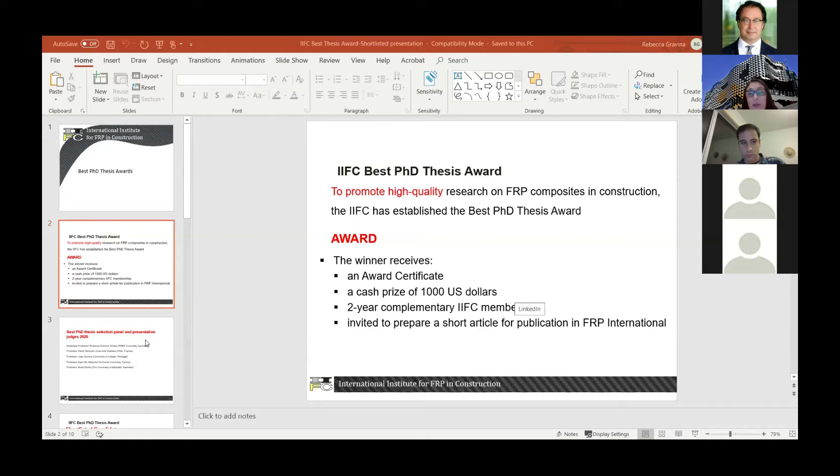We received several applications, and the selection panel and judges for this year are as follows. I've chaired the Best Thesis Award category. Professor Karim Benzarti also worked on the committee to shortlist applicants, and we have Professor João Correia, Professor Alper Ilki, and Professor Scott Smith as part of the presentation judging panel today.

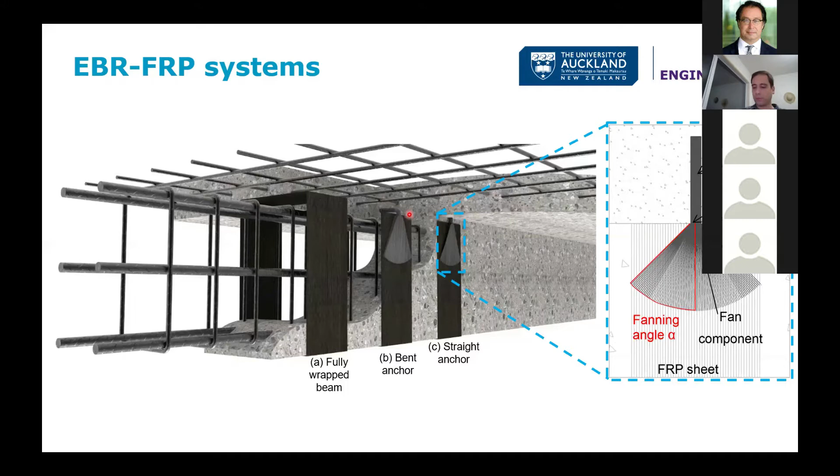Then we have the fan portion, where all the fibers fan out and bond to the sheet behind. We can make wide anchors or narrow anchors, and that width is determined by the fanning angle alpha, which I specify as half of the fan - you'll see why in a few minutes.

The part of the anchor where the fibers transition from the dowel into the fan is usually called the key portion, because it's where all the fibers break if we have fiber rupture failure mode. In addition to the diameter and embedment depth of the dowel, we have the fan dimensions and the insertion angle beta.

So all of these parameters at the bottom will determine the failure mode. This is how I started my PhD, looking at the different failure modes we can observe in FRP anchors. On the left-hand side, these six here are concrete-related failure modes, for straight anchors at the top and bent anchors at the bottom, and the governing parameters are the strength of the concrete, the depth of the dowel, the diameter, and the insertion angle beta.

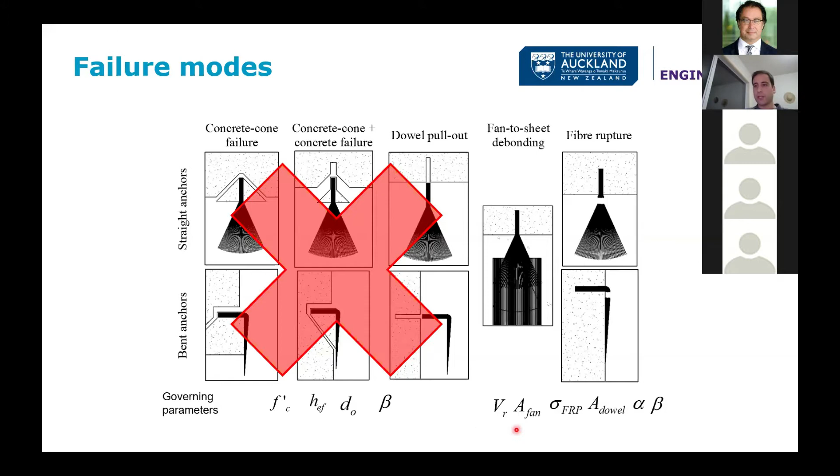Then looking at the next failure mode: fan-to-sheet debonding, where the fan debonds from the sheet in the background, and the parameters are the shear strength of the resin and the area of the fan. But I thought this wasn't really interesting to me, and it wasn't complex enough for a PhD project.

So I focused on the fiber rupture failure mode, where all the fibers break, usually in the key portion, whether we have straight or bent anchors. The parameters are the strength of the FRP - you can also use the modulus of elasticity times the rupture strain - the area of the dowel, so how big the anchor is, the fanning angle alpha, so how wide or narrow the anchor is, and the insertion angle beta.

Once I knew what I wanted to do, I had to figure out how to do it. So I developed this testing setup, similar to the shear strengthening of a beam we saw in the first slide, but upside down. That beam at the bottom is the slab, where we have the anchor introduced, and then we have a concrete block at the top, which is the beam, and these two are not connected.

Then we have the sheet wrapped around the block, with the FRP bonded to the sheet and then introduced into the beam. Without spending too much time, I basically lifted this block vertically until the fibers broke, and recorded the load. This is for straight anchors. On the right-hand side, for bent anchors, similar approach, just the anchor goes bent into this block rather than straight.

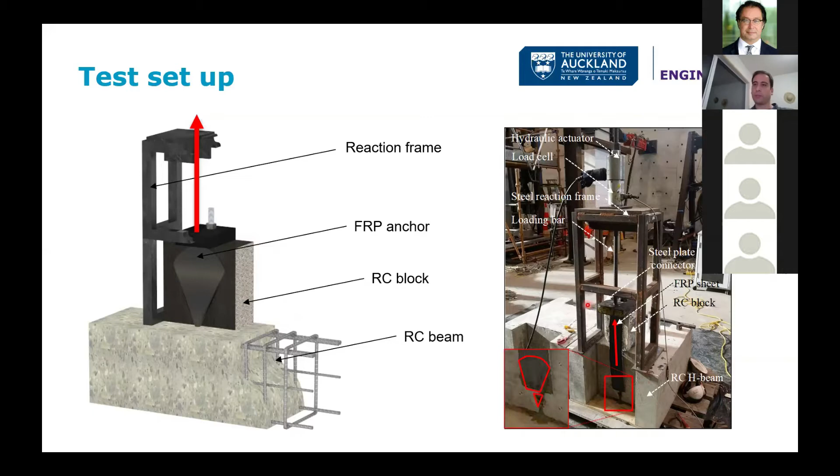So I spent a whole lot of time in the lab, getting my hands dirty, installing FRP, breaking FRP, and I ended up with 110 specimens: 72 for straight anchors and 38 for bent anchors.

In terms of fan angle alpha, I looked at three different angles: 15, 27, and 60 - 27 because it's as wide as it is long. Then for straight anchors, I looked at different sizes, in dry cross-sectional area, from 14 square millimeters all the way to 168 square millimeters. However, for bent anchors, when I got to 84 square millimeters, the efficiency was very low, something like 40% or 45%.

Talking to the engineers at the company I was working with, they told me that if the efficiency was so low, they wouldn't use it anyway because it wouldn't make sense from a business or economical point of view. So I stopped there. That's why I have fewer specimens of bent anchors.

So I recorded the load for all of these 110 specimens, and I started to look at the scientific background, at the theory of how the force is transferred from the sheet on the right-hand side, through the sheet, through the anchor, through the dowel, into the concrete on the left-hand side.

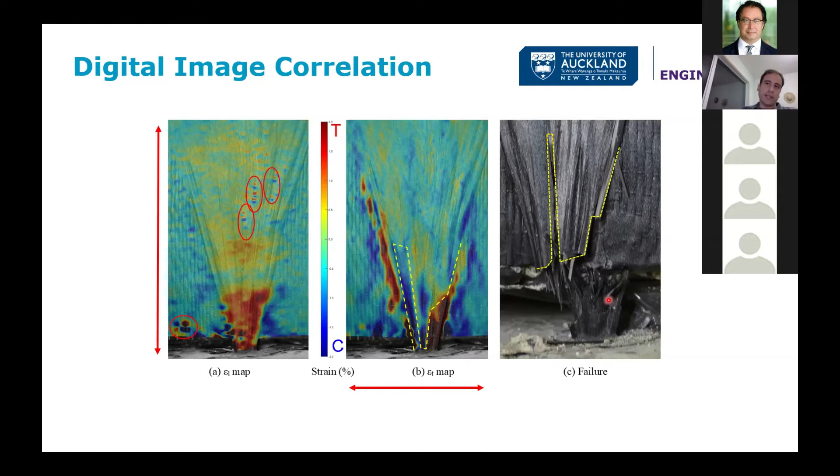That got me thinking that, in fact, the strains in the transverse direction play a role as important as the strains in the longitudinal direction. So I thought, well, as the anchor gets wider, the load decreases for the same size. So wide anchors are less efficient. That means that for wide anchors, that factor is more important than for narrow anchors.

I came to the conclusion, without spending a lot more time on this because I don't have the time, that if I do the sum of all the infinitesimal forces in the longitudinal direction minus all the infinitesimal forces in the transverse direction times 2, then my data match this hypothesis very well. So I was very happy with that.

The problem is that this force transfer mechanism doesn't account for the 3D direction, for how big that dowel is. And from research and from my own experiments, I knew that a big anchor is less efficient. An anchor twice as big is not twice as strong. So I started to look at different options.

I looked at many different hypotheses of how or why that could be. And I came across Mobius transformations, which, if I have to be honest with you, is really complex. It's fundamental mathematics. I had to go to the Faculty of Math to talk to a professor there to really understand what this was about. Long story short, these are used to map the complex unit circle into the real axis line.

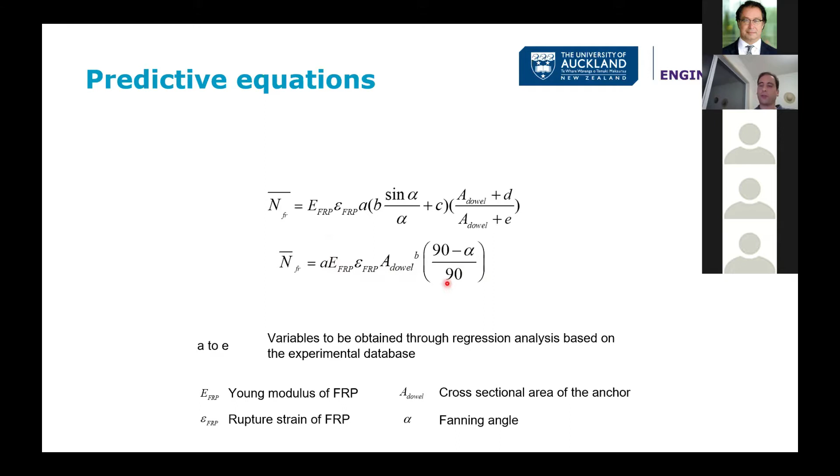Looking at the statistical distributions, standard deviations, and so on, I developed 3 equations: one to predict the average value, one for the 95th percentile lower bound characteristic value, and another for the 99.87 percentile, a value sometimes used in FRP, for both straight and bent anchors. The only difference is the factors A and B.

So this all looks good, but while doing this testing in the lab, I thought, how applicable is this really? I'm doing one test of one anchor in the lab - how applicable is that when you have a whole structure, multiple anchors, FRP wraps, and all of that? So I decided to do a case study.

I decided to do flexural strengthening of columns for 3 reasons. First, because there is no research - the only paper I could find, by Professor Alper Ilki, used a similar approach with longitudinal FRP, but not anchors. Correct me if I'm wrong, but I think he used NSM bars. So I thought this was a very innovative idea.

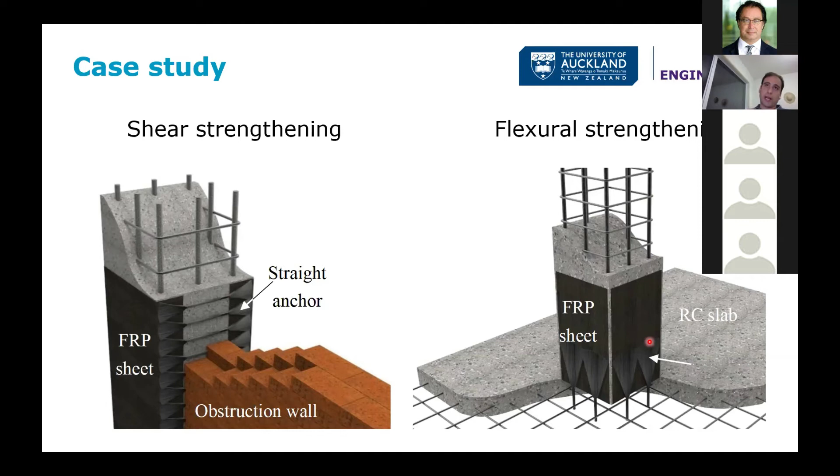I designed 6 columns based on those from Contec, the company I was working with. We built them in the lab, and I tested 1 without FRP and 5 with FRP. There's a lot of information here, but bear with me - the main objective was to check if I could calculate the moment capacity using section analysis.

But for columns 5 and 6, we decided we wanted to break the sheet rather than the anchor, because the company thought it would be easier to repair if it failed. So we increased the number of anchors and their size, and we could calculate the moment as well.

Finally, in column 6, I used a bond breaking layer at the bottom half meter, because we observed in these 4 columns high asymmetry, and the FRP would debond in the compression cycle by something similar to buckling, instead of the tension cycle by slowly debonding.

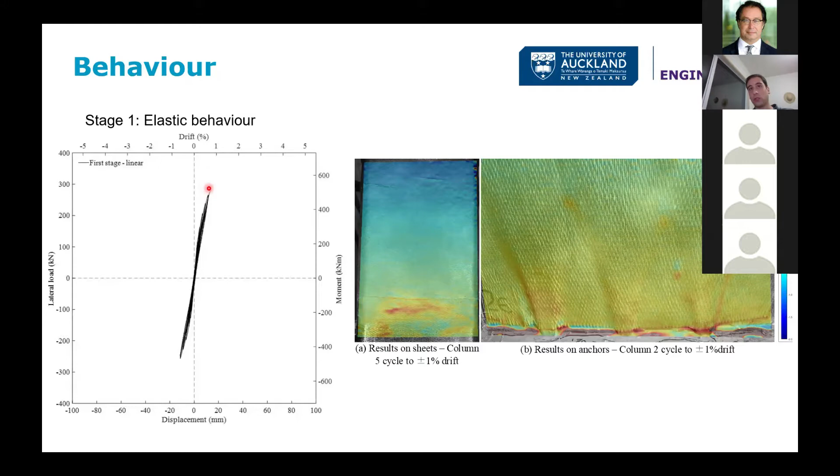Then an inelastic hardening stage. This is column 6, by the way, so you can see it's quite symmetric. In this stage, all the FRP debonded from the bottom all the way to the top until the first FRP rupture. That's the peak point, where the FRP ruptured for the first time, whether it was an anchor or a sheet.

Then in stage 3, the FRP ruptured slowly, depending on the column, sometimes more slowly than others. And then when all the longitudinal FRP was broken, the as-built behavior was resumed, which summarizes to this trilinear behavior: linear elastic, inelastic hardening, and then as-built, which gives us 2 points, the debond point and the peak point.

Now, there is a lot of numbers in here, but don't try to read them, just listen to what I'm saying. R2K, by the way, is just using Response 2000, using moment curvature and section analysis.

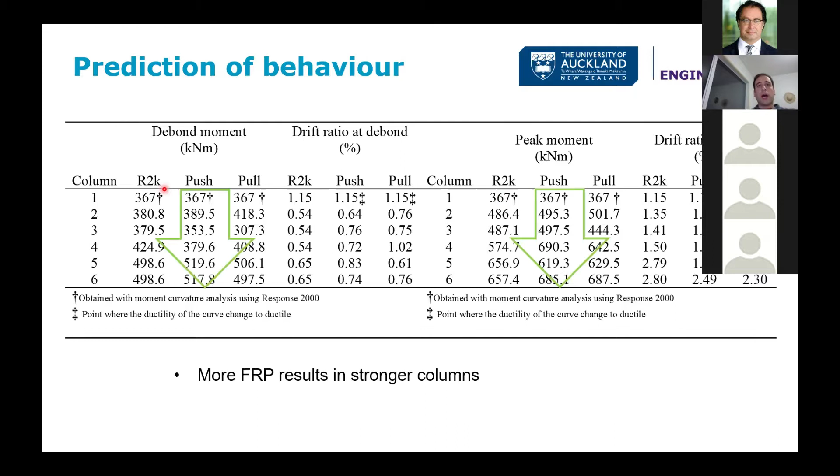As we increased the amount of longitudinal FRP, the moment increased, both the debond moment and the peak moment. And I could calculate that quite well, I think. 6.2 difference, 6.6% difference, so I think it works. It's just section analysis, with one more material with different properties, but it can capture the moment capacity.

However, the drift is all wrong, because all of the plastic hinge theory and all the drift theory is based on reinforced concrete, steel and concrete. So it cannot capture the stiffer columns that result when you put FRP in it.

And I am about to finish. If I had to say what I did during 3 years in 2 sentences, I would say that I developed new equations that allow predicting the fiber rupture failure mode of FRP anchors. Then I combined them with existing research by Scott Smith and Ravi with other failure modes, but that was not part of my PhD, so I left that out of this presentation.

And then I developed a new innovative seismic strengthening scheme for reinforced concrete columns. Now, I think the work is quite highly cited. I published most of my research last year in 2019, but I am more proud of the impact that the research is having in the industry.

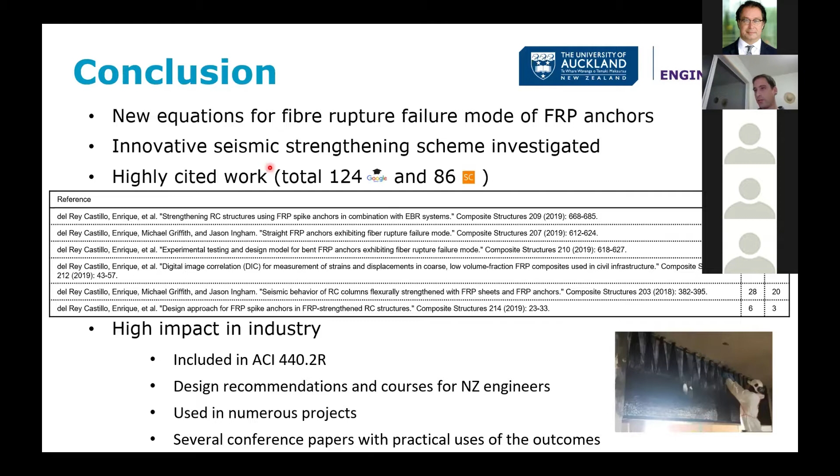So that's something that makes me proud, and these are used in many projects. This is a coupling beam for shear walls, columns. This is a bridge to elevate the seismic capacity of the pier wall. And I published several conferences summarizing these practical uses. And that's all. Thank you.

Thank you, Enrique. That was very informative and really well presented. So I enjoyed listening to your presentation. Thank you for that.

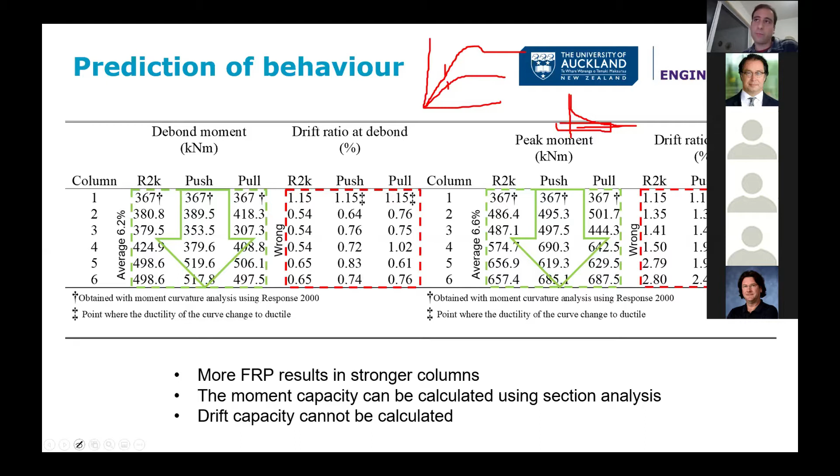But it becomes really complicated because we actually have two plastic hinge lengths. Basically we have one plastic hinge here at the bottom, the normal one. But then at some point when all the FRP is debonded, a second plastic hinge forms here. So you have double curvature - the first one going like this, and then the second one going like this. It's really, really complex.

Okay, no, I understand. Good, thank you. No problem. Do we have any more questions?

Rebecca, perhaps I can ask a very short question. Thank you, John. First of all, Enrique, congratulations for your excellent work and very nice presentation. I have just a small question - your work is of course very comprehensive. You solved, let's say, a problem. You have provided recommendations for design guidance. You have industrial applications. What's left to be done in the future? Is this a closed topic now, or is there something else still to be done?

So there are a lot of uses for FRP anchors. This use is only when you want to transfer the whole load or part of the load from the FRP sheet into the structure with anchors. But I think one big portion of research that needs to be done is what happens when you have FRP anchors in the middle. How is that going to change the boundary conditions, the bonding between the FRP sheet and the concrete? I'm trying to get some funding for that, but it's really hard because it's going to be expensive research.

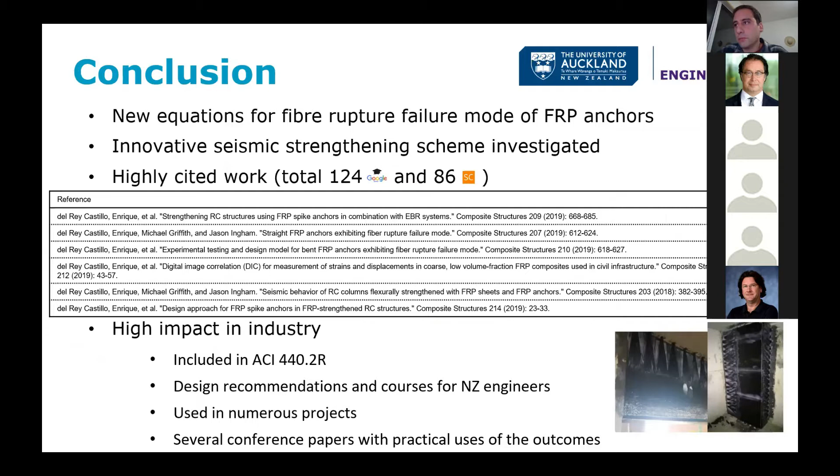You mean in the column test? Yeah, in the column test. No, they were all like this because I didn't want concrete failure. My whole PhD was on fiber rupture, so I focused on the fiber rupture.

Okay, because there's probably another issue about slip. In our experience, where we use this kind of FRPs, of course straight, not bent, we had an issue of slip as well, which might have been playing a role on the displacement as well. In your case, if there are some fiber ruptures, not at the same time, but some gradual rupture of the fibers.

Anyway, sorry. Yeah, I did another, I'm not sure how many, I think 8 or 10 columns in the last couple of years with funding from Ravi and Tarek. And we didn't use this method to be a bit more realistic.

And we couldn't see any slipping of the dowel out. We were trying different things. The paper is in the second round of review, so it should be published soon. We tried to do a bad job at installing the anchors, basically, a bad job at soaking the anchors, but the dowels never came out.

Okay, thanks a lot. Yeah, thank you.

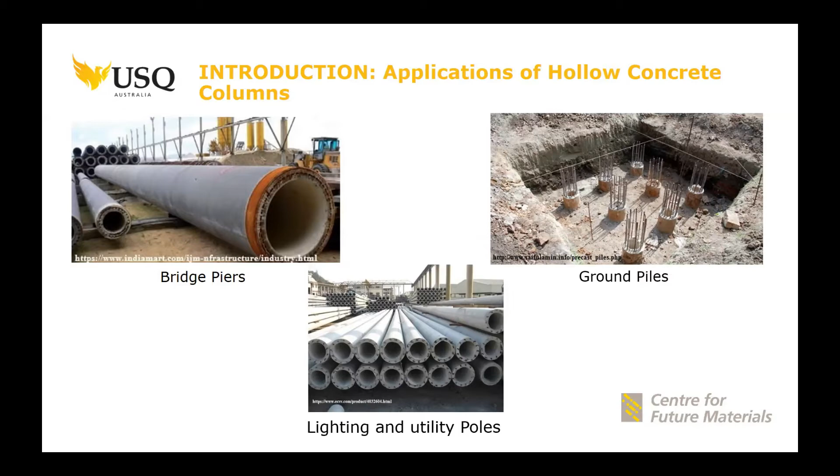So I was looking for the current applications of hollow concrete columns, and I found in the industry there are quite a few applications including bridge piers, ground piles, and even lighting and utility poles. From that I concluded that it can be implemented, and many people before me have already implemented the idea. However, it's a little bit limited, and I was looking at what the advantages and benefits of designing hollow sections are, and what the limitations are, because I can see there is limited widespread use for that type of application.

And from seeing the cross section itself, you can tell it's lighter in weight, and for sure the design will be more economic and structurally efficient. I drew many lines underlining 'structural efficient.' So I was about to quantify how the concrete column with a hollow section inside can give us a reduction in material compared to the reduction in the inertia as well.

So here you can see the inner diameter and outer diameter of the hollow concrete column. Based on basic engineering, I did a small quantification of increasing the inner to outer diameter ratio in terms of material reduction and inertia reduction. I found that you can get significant material reduction with very minimal inertia reduction. As a case study, a 0.5 inner to outer diameter ratio can give you a quarter material reduction and only about 5% inertia reduction.

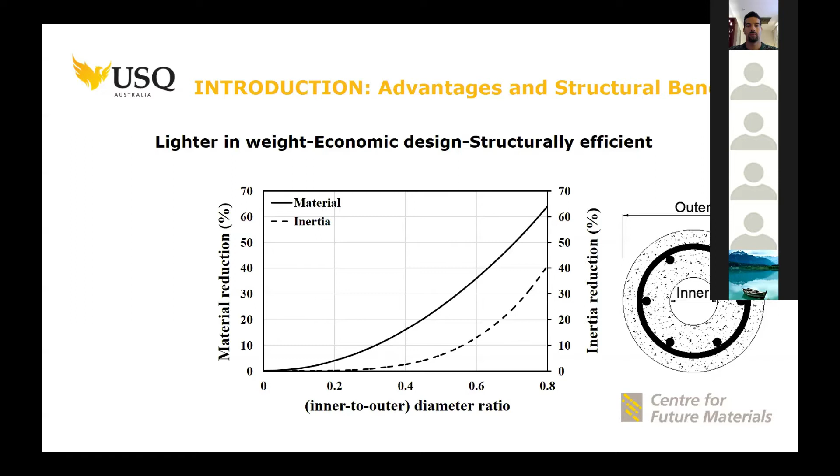After that, I looked at the stability of hollow concrete cross sections, and I found that with the slenderness ratio aspect, increasing the inner to outer diameter ratio reduces the limit of the slenderness ratio. All of these aspects got me convinced about this application and motivated me to investigate it further.

So I asked myself: why is it limited? Why isn't it more widespread? Because people generally prefer solid sections over hollow sections.

From the literature, I found an interesting answer starting from the premature failure phenomena for hollow concrete sections and their lower ductility or displacement capacity. As an example, one scholar did a study in 2010 comparing solid and hollow sections together. You can see they're similar in stiffness, since we're talking about stress to deformation behavior. However, the peak is different - there's a gap between solid and hollow columns at the peak.

The most critical part is the response after the peak, which relates to displacement and ductility behavior. You can see that the solid section introduces a more stable behavior than the hollow column, which gradually reduces its load or stress capacity.

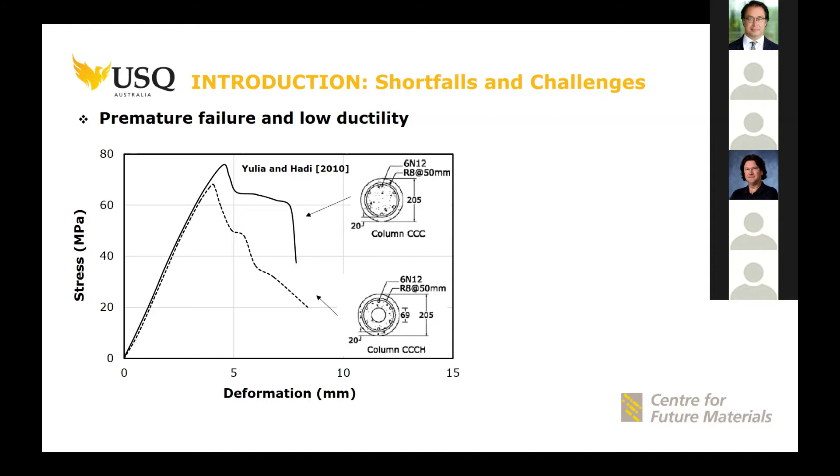In one of our published papers, we go in depth describing that phenomenon based on the constituent behavior of the column itself. In a reinforced concrete column, there are three parts composing it: the unconfined concrete cover outside, the reinforcement, and the inner confined concrete core.

By looking at the behavior of the confined core versus the unconfined core, we can tell that the unconfined cover is shared between solid and hollow sections, and the steel bars have the well-known plastic behavior.

However, the confined core inside is the major difference between hollow and solid concrete columns. The steel bars and unconfined concrete behave similarly, but the confined concrete is different. That's due to the absence of the core inside, which changes the stress formation from triaxial in the solid section to biaxial in the hollow section.

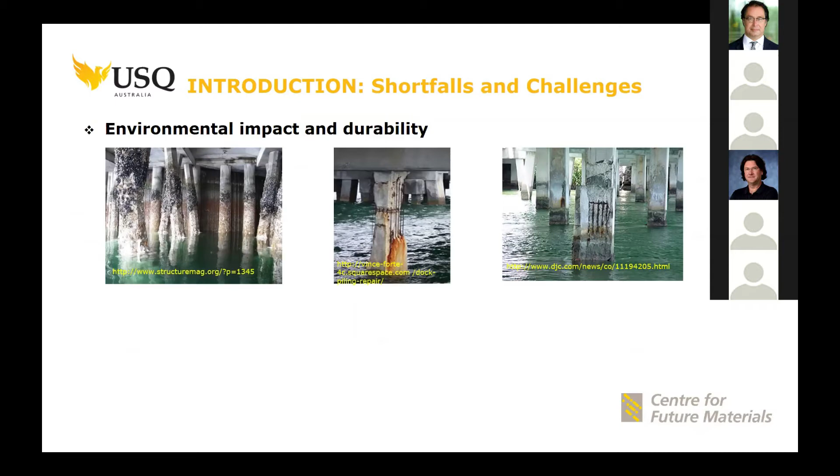We then went deeper to find another challenge, a global challenge related to the durability of these sections, especially RC steel reinforced sections. We all know about corrosion and how it can damage RC members.

To give an example, Australia spends more than 13 billion dollars per year on demolishing, rehabilitation, and other techniques to deal with corrosion problems, including shutdown costs and rebuilding structures.

There have been many studies trying to overcome corrosion. We can see there are many techniques for that, starting from galvanizing the steel and coating with epoxy, and cathodic protection for the steel bars. However, all these studies just confirm that steel corrosion is reduced, but it's never actually stopped. And there is additional cost to having these techniques.

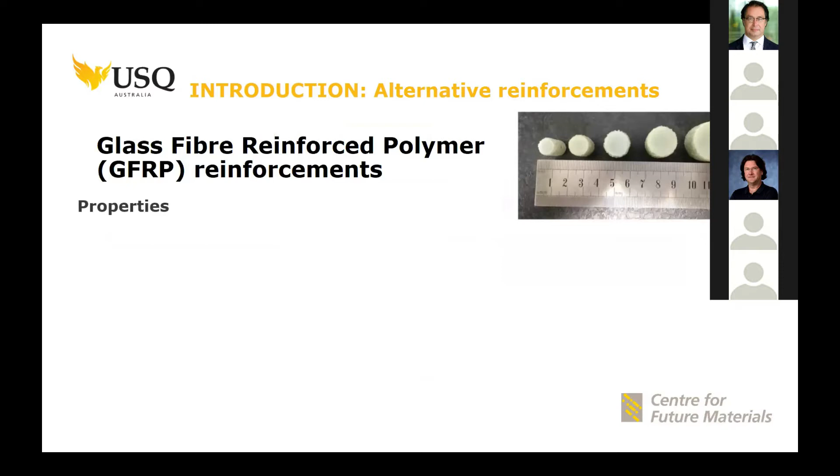So an essential question is, what is the alternative? We all know that the newly manufactured reinforcement, glass fiber reinforced polymer, is now globally accepted as internal reinforcement for concrete structures, and you can tell from its properties of having high strength compared to steel.

You can see from the figure the difference in strength, at least double the strength. Despite the low modulus of elasticity, it has high strain capacity, at least 1.5 times the rupture strain, not the yield strain, of the steel bars. All of this depends on the grade of the glass fiber bars and the steel bars. There's also a high strength to weight ratio for GFRP bars compared to steel bars, around 0.25 or a quarter of steel density.

From our recently published work on GFRP reinforced sections, we replaced the galvanized steel bars in the boardwalk planks with GFRP bars. The doubt was the initial cost of the bars. However, we were able to reduce the manufacturing time by 30% using the GFRP bars, related to the density of the bars and the handling process.

On the other hand, these bars don't corrode and are neutral electromagnetically for special designing purposes. These are not new bars; there are many successful applications in slabs, beams, columns, footings, walls, and beam-column joints, among other applications.

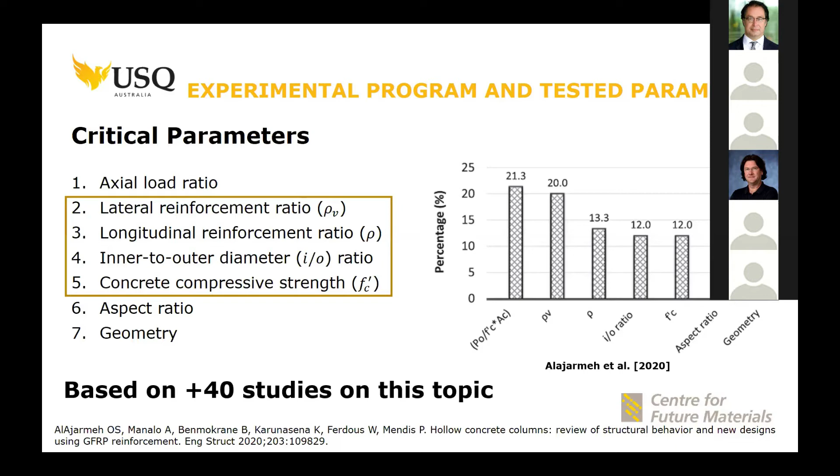Because of that, we selected these highlighted 4 parameters and designed the experiment based on them. We selected a range of inner to outer diameter ratios, different longitudinal reinforcement ratios, and different lateral reinforcement ratios by changing the spacing between lateral reinforcement. We also selected 4 ranges of concrete strength within the normal range, and tested under pure compression until failure, using strain gauges and LVDT instrumentation.

From the test results, the effect of inner to outer diameter ratio was very clear. We were surprised to see that increasing the inner to outer diameter ratio increased both the strength and the displacement capacity. That was absolutely related to the properties of the reinforcement, which steel reinforcement cannot achieve, because of the linear elastic behavior of these bars until failure.

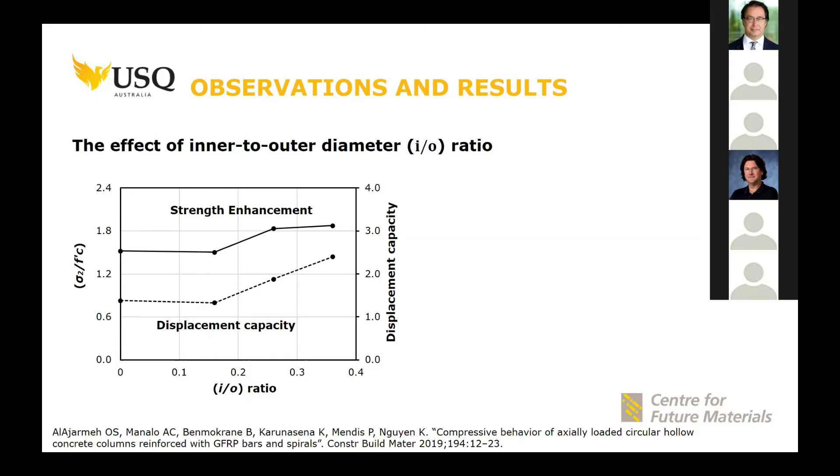One interesting thing we saw with the maximum inner to outer diameter ratio column was its failure mode. The failure occurred inside the concrete core with the longitudinal bars, but without any failure in the lateral reinforcement, which is different from all the previous columns. We relied on that finding.

We studied and investigated this in depth to describe the phenomenon using something called a stress index of the reinforcement and the core. From that analysis, we found that if the stress index inside the concrete is more than the stress index of the lateral reinforcement, then failure will be in the core, not in the spiral. Because of that, we selected 0.36 as the optimal inner to outer diameter ratio to use in the other samples.

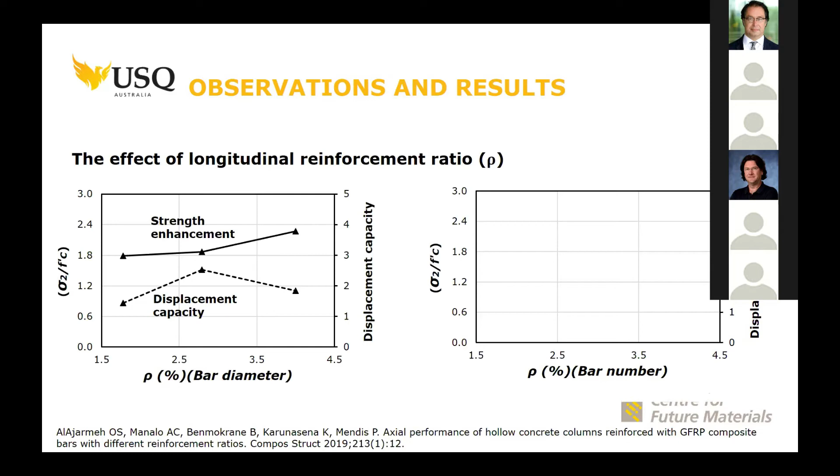We were able to innovate something new related to the opening effect between the longitudinal fibers, and how those longitudinal fibers contribute to the lateral confinement as well. That was the innovation in that paper, as you see at the bottom of this slide.

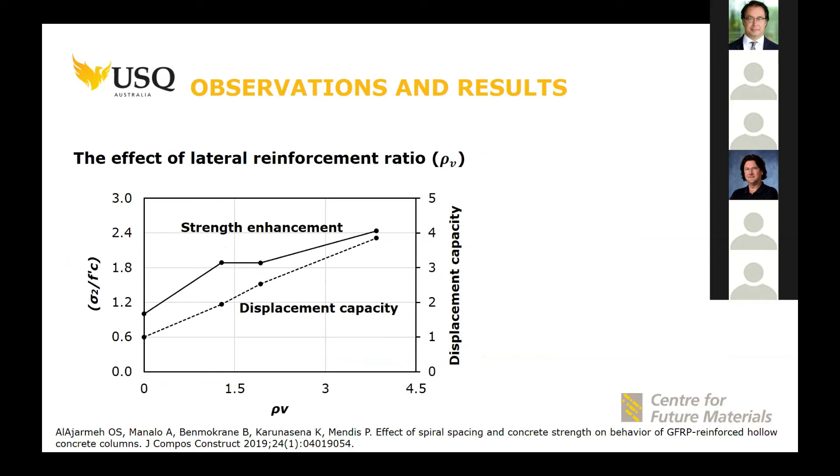For the effect of lateral reinforcement, we changed the spacing between the lateral reinforcement. As expected, we get a strength enhancement in the core and also significant displacement capacity, related to the lateral confinement concept from the bars and from the lateral spirals.

For the effect of concrete strength, there was no strength enhancement observed in the concrete columns with GFRP bars, because we normalize the numbers, and that normalization for all types of concrete gives us the same strength enhancement. However, the displacement capacity reduces with the increase of concrete strength, because the brittleness of the concrete increases with increasing concrete strength.

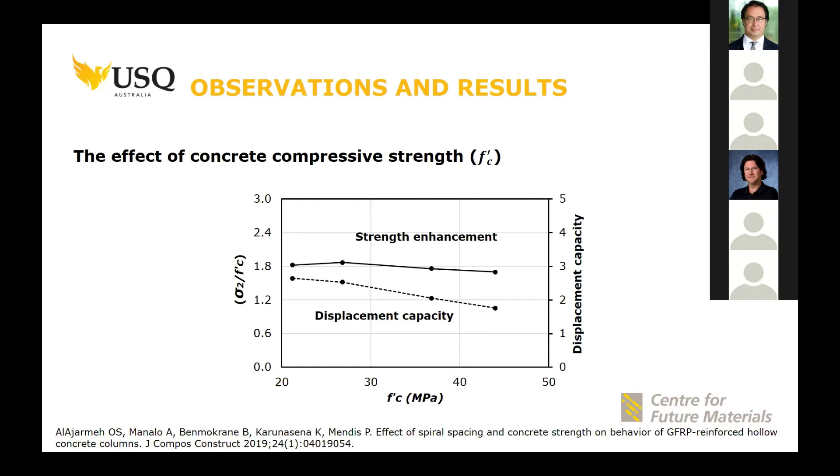After studying all of these parameters in depth, we decided it was time to introduce something novel for design engineers and the research community regarding these columns. So we started to design a theoretical or empirical model to capture the effect of all of these factors.

That concrete behavior is based on two critical points: the peak point and the fracture point. So we used this theory.

With the existence of the experimental data we have, we initiated relationships to find these peaks and their locations. The model is based on modeling the concrete itself by dividing its behavior into an ascending line and a descending line, all based on the experimental design parameters. Then, by taking the linear elastic behavior of the GFRP bars and combining them together, we can find the total behavior of the GFRP reinforced hollow columns.

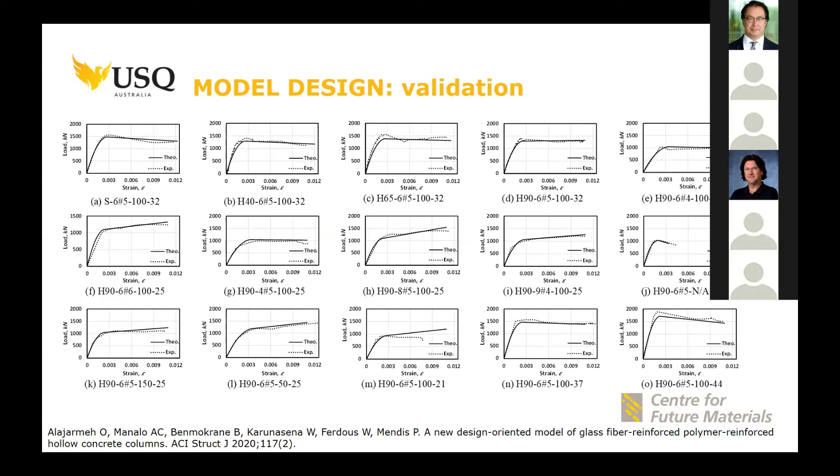Applying the same theory to the whole columns, we validated this model with all of the experimental data we have, finding good agreement.

At the conclusion, we were able to develop a new structural system on the hollow concrete columns. After the trials in the 1990s, all the research was towards implementing new techniques to strengthen the steel reinforced hollow concrete columns. But with a new design of GFRP bars, we are starting from that same point in the 1990s to open new research ideas and opportunities to enhance the newly constructed hollow concrete columns, but with GFRP bars.

We were able to overcome the related structural and durability issues in the current design of the hollow concrete columns. We also identified the major or critical parameters affecting the current design of the hollow concrete columns, and we were able to introduce a design model to describe the behavior of the hollow concrete columns with GFRP bars.

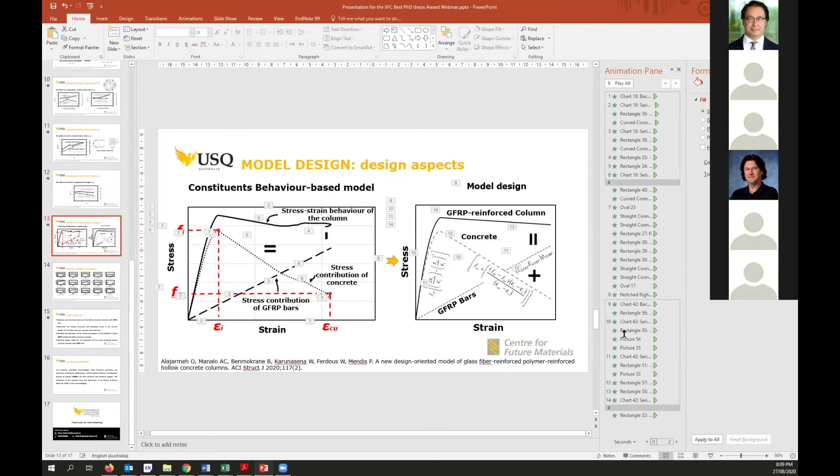Omar, congratulations for your excellent work. You mentioned at the end of the presentation, when referring to the design approach, that you considered the contribution of the FRP bars. I was wondering, did you measure the compressive strength of the rebars, and what was the ratio between the compressive and tensile strengths of your rebars?

Actually, after finishing my PhD, I looked into standardizing a test for GFRP bars under compression, and we have done that successfully.

There are published papers on that. So in terms of strength, you can attain the same strength as the tensile one if you did the test correctly. The strain is a little bit lower because compression is different from tensile in terms of the stress transformation inside. There is now a test setup for testing these bars under compression, and contradicting previous research, we've gotten the same strength as the tensile strength of the bars.

This is a bit different than the recommendations available in design guidelines. I'm looking forward to seeing your results. But in these predictions, did you consider compressive strength equal to tensile strength? This is my question, only for the predictions.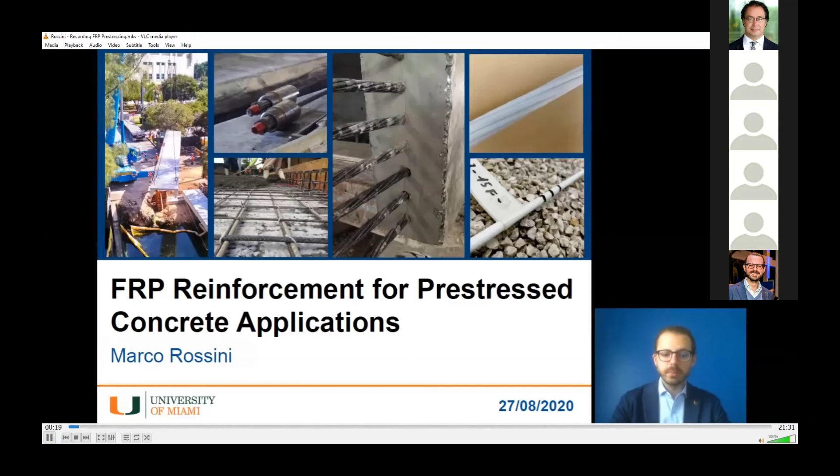Dr. Marco Rossini, and the title of my dissertation that I defended almost one year ago at the University of Miami is FRP reinforcement for pre-stressed concrete applications. I don't think FRP requires a lot of introduction in this context, but I want to start by discussing the significance of this research and the problem we want to address.

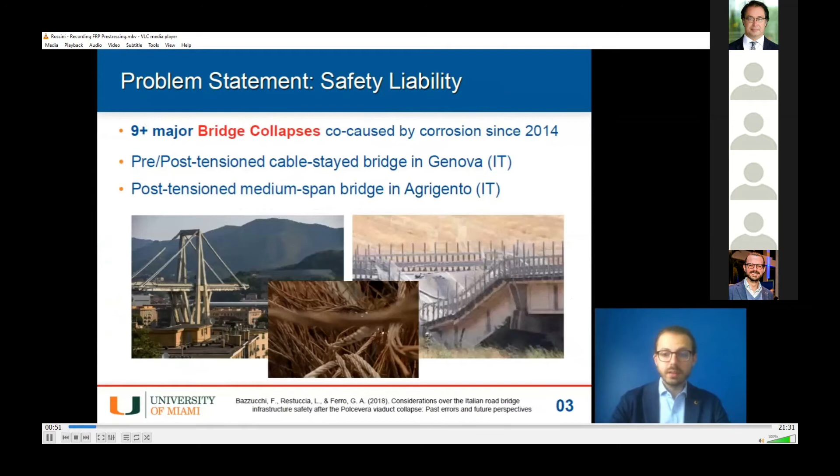The problem is corrosion of our infrastructure. We know it is an issue from the cost perspective. Just to give a figure, the annual cost of corrosion for highway bridges in the United States amounts to $8.3 billion. But corrosion is also an issue from the safety perspective, with nine major bridge collapses caused by corrosion since 2014. Finally, corrosion is also an issue from the sustainability perspective and the resilience of our infrastructure and coastal communities. We know we can mitigate these issues by using non-corrosive reinforcement.

So we believe that the solution to this problem, or part of the solution, can be found in fiber reinforced polymers. Carbon has been widely used for pre-stress applications in the past, whereas glass has been used for reinforcement applications. Whether glass can be used for mild pre-stressing applications is the question we want to answer today.

In order to answer this question, we need to fill some knowledge gaps and bring some creative contribution to do so. This dissertation is made up of three separate but closely related studies. The first deals with the current state of practice in pre-stressing with carbon FRP. The second proposes an alternative solution in the form of pre-stressing with glass FRP. The third study fills a fundamental knowledge gap that currently prevents using glass in pre-stressing applications, and that gap is in creep rupture behavior.

In order to conduct this research, of course, we needed some money. I was lucky to be the author of two successful proposals for funding. The first was for US federal funding through the NCHRP IDEA program. The second was for seed funding in a project that also involved the University of Houston and the University of Texas at Tyler.

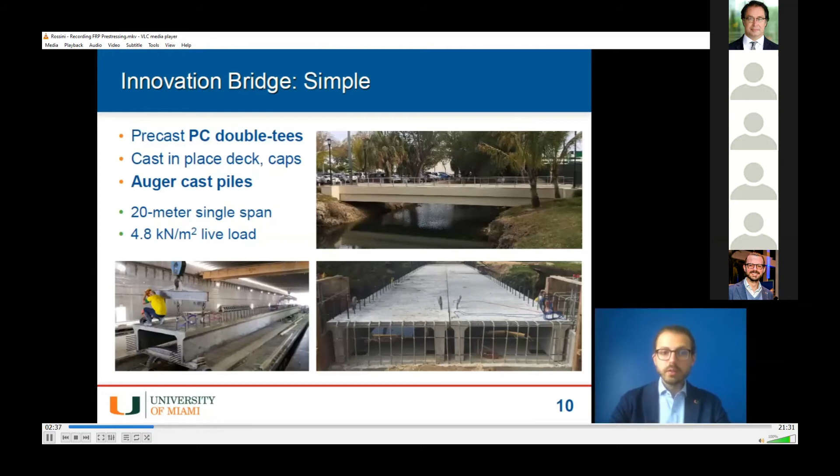Let's move on to the first part of this study now, that deals with pre-stressing with carbon FRP and focuses in particular on a specific structure that we call the innovation bridge. This bridge is simple. It's made of two precast pre-stressed double T-girders, a cast-in-place deck, cast-in-place caps, and auger cast piles. It is 20 meters long and is designed as a pedestrian bridge. So we call it the innovation bridge because, in its simplicity, it is also iconic.

It is entirely reinforced using FRPs and non-corrosive reinforcement. We have carbon for pre-stressing, and glass and basalt for reinforcement application.

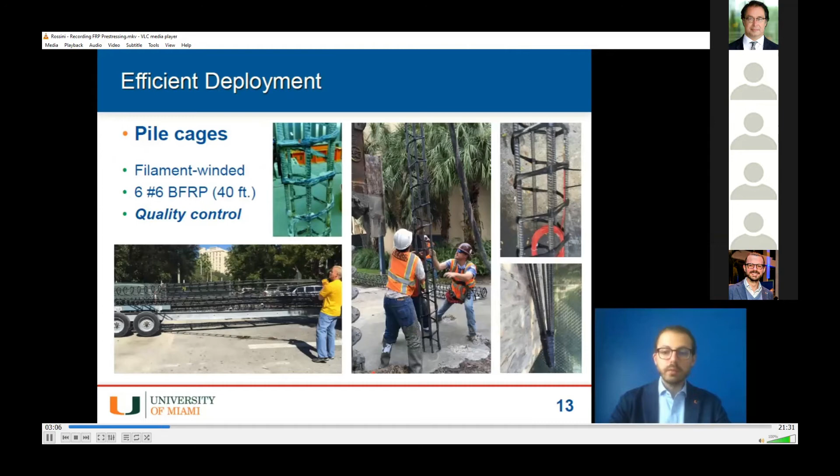During the construction phases of this bridge, we noticed there were no real issues in handling reinforcement, whether made of glass or basalt, as long as it was not pre-stressed. Here you can see the installation of pile cages. They were very light and easy to install. Here you can see the deployment of some innovative shapes in the form of closed stirrups made by filament winding.

But finally, the culprit. There were indeed some issues in applying pre-stressing to carbon FRP. It is a very effective technology, but also a very complex one, and we will have time to dig into all the specifics of these issues. But first, let's have a look at how we approached the design of the structure.

When I first approached the design of the innovation bridge, I was just a young PhD student, and I noticed there were a lot of different codes and standards for dealing with the same issues. I decided to come up with what I like to call a unified design approach that covers reinforced concrete and pre-stressed concrete with FRP, that takes off from ACI standards, integrates them with ASTM material specifications, and looks at AASHTO bridge design specifications for everything bridge-related. All while keeping in mind that consistency is paramount if we want wider deployment of FRP reinforcement and make practitioners comfortable with this new technology.

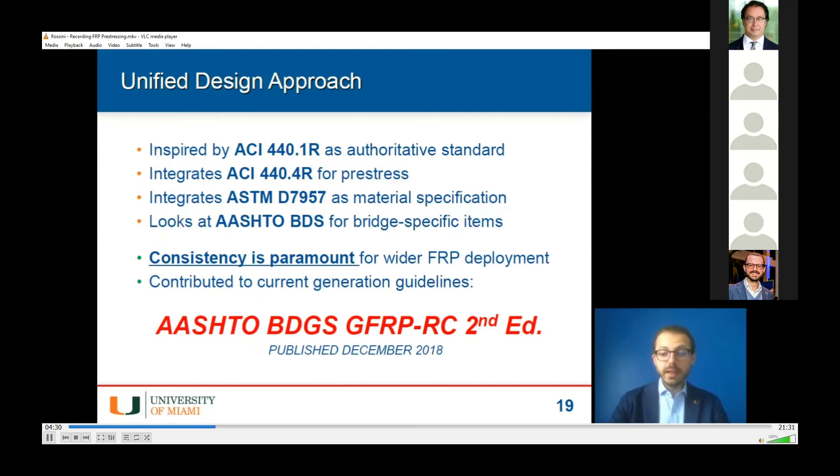All this work was very helpful in allowing me to design the innovation bridge, and was also instrumental in helping us develop the second edition of the AASHTO Bridge Design Guide Specification for GFRP Reinforced Concrete, a guide published in 2018 that filled one of the fundamental knowledge gaps that existed in design guidance for practitioners, at least in the bridge industry.

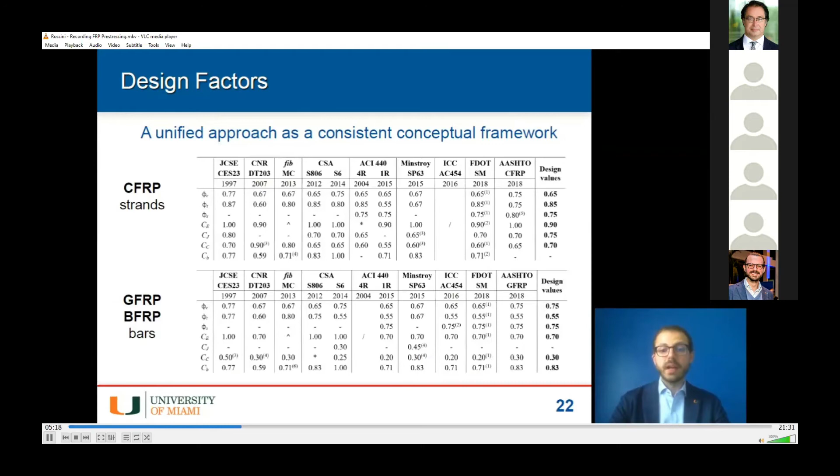For what concerns design provisions, they are quite classical, as long as you provide all the adequate reduction factors for all the respective ultimate and serviceability limit states. You can design using FRP as an alternative material with respect to steel. Different standards define these safety factors in different ways, but as long as one takes a consistent approach in looking at different standards, this consistent conceptual framework can be used as a tool to identify areas of potential improvement and areas of further research.

For what concerns design equations, there's nothing really new. The fundamentals are always the same, the sections remain plane, and the rest follows from there.

Let's move to a more exciting part of this presentation in order to make sure our design approach was reasonable, made sense, and was working. We have to test and monitor our structure. In order to do that, we placed quite a number of instruments on our bridge, including vibrating wire gauges, dial gauges, and surveying targets for monitoring during in-service conditions, and we performed a series of load tests.

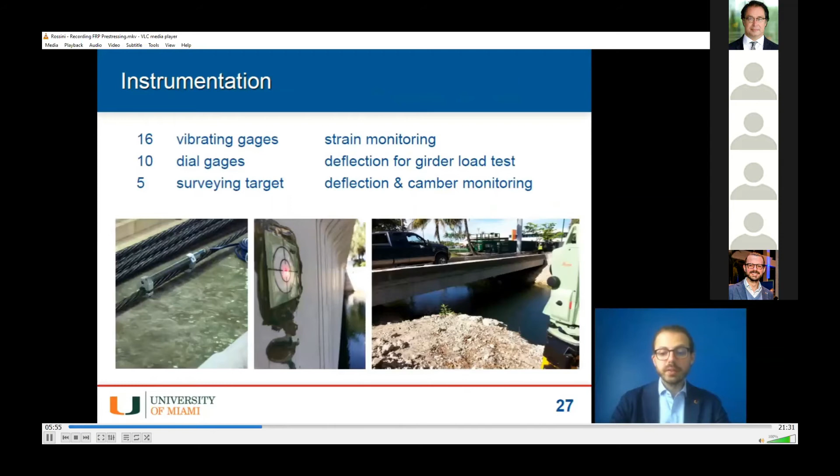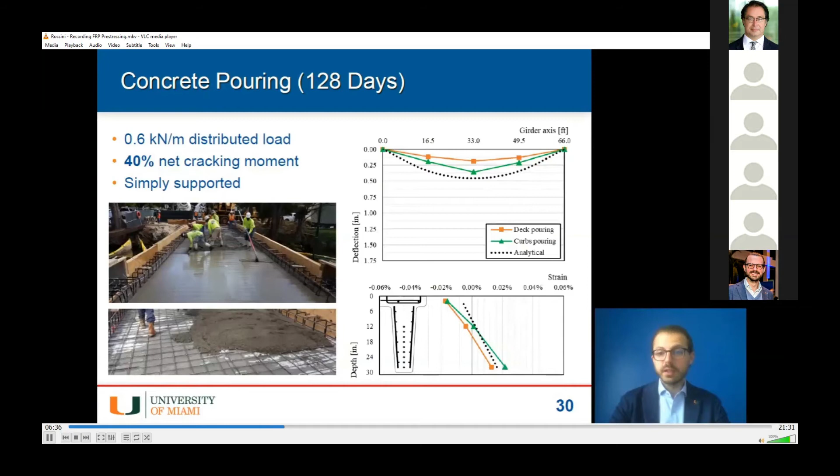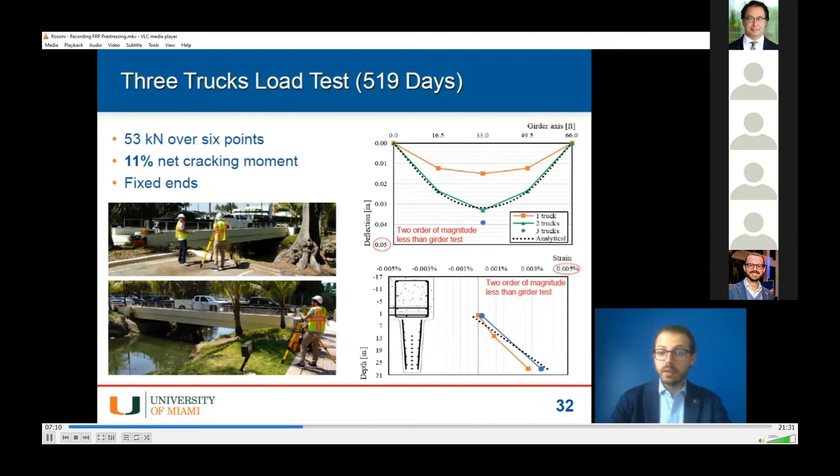And we went back again, this time with 3 trucks, more than 1 year into the service life of the structure. Also in this case, you can see from the figures on the right that both in terms of deflections and strains, we have very good agreement with our theoretical expectations. This confirms our conceptual approach to design with FRP, being it pre-stressed or reinforced structures.

And this concludes the first part of this dissertation, when we discussed the development and deployment of a unified approach for design, and when we first identified some issues in the deployment of carbon FRP as opposed to glass FRP for reinforcement applications.

Let's move on to the second part of this dissertation, when we dig into the technological issues experienced using pre-stressing with carbon FRP, and how we want to address them using GFRP. First of all, the issues.

Carbon pre-stressing is a very effective technology, but also a very complex one for a series of reasons. First of all, carbon is an expensive material. It comes at 4 times the cost of traditional steel strands. It has a relatively high pseudo-Poisson ratio that can cause concrete to spall and crack when we release pre-stressing. It's also a complex technology that requires large anchors, splicing, and typically proprietary technologies. Finally, it's brittle, and this can be an issue both during constructability for safety concerns and during the service life of the structure.

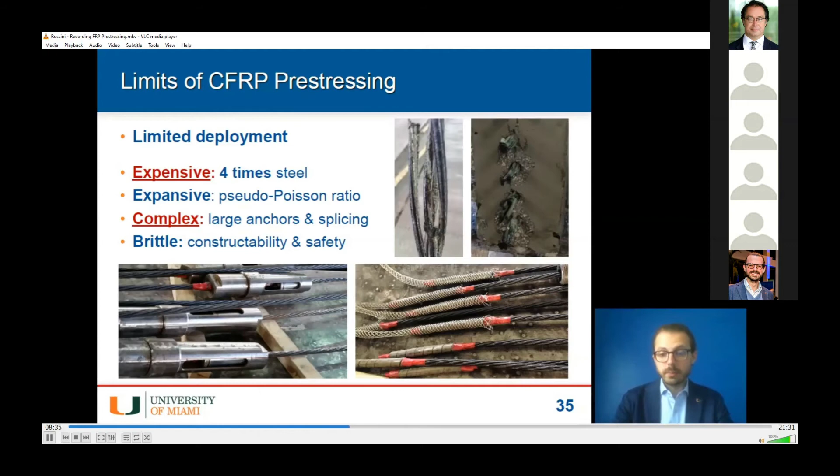If you think about it, you can mitigate all of these issues by reducing the level of pre-stress applied to your strands. If you reduce the level of pre-stress, you can use simpler, smaller anchors, and still achieve high constructability. You can limit cracking in your concrete, because that is directly proportional to the level of pre-stress applied. And you can also achieve safer pouring, because now you're working at a level of pre-stress that doesn't represent a hazard for people working outside.

But of course, if you reduce the level of pre-stress in your structure, you cannot target all the structural elements that are out there. You cannot target bridge girders, at least not at this stage. We are focusing on those elements that require the least amount of pre-stressing, but also experience the highest degree of corrosion. These elements, in our opinion, are substructural elements: bearing piles, sheet piles, particularly in coastal areas.

If the solution we want to adopt is reducing the level of pre-stress in our structure, we need a material that makes sense from both the cost perspective and the mechanical efficiency perspective. We believe this material is glass, particularly in the form of a 7-wire strand, of which you see a prototype in these pictures.

Glass is more economic than carbon. It comes at 1.5 times the cost of steel, and is going down as more manufacturers are coming into the game. It's a more efficient technology for pre-stressing because it has a lower modulus that results in lower pre-stress losses. If we reduce the level of pre-stress, as already said, we can use simpler anchors. Also, glass is a pseudo-ductile material, in the sense that it can achieve larger displacement with respect to carbon at a lower level of stress.

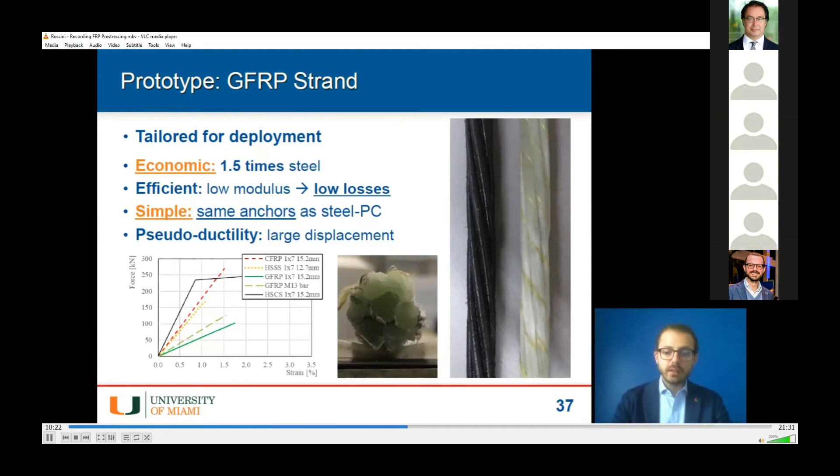But no one has ever tried to do this in the field, or even in a laboratory, so we need to collect some experimental results, and we need to do our homework to see if this is actually feasible.

But we don't just need our material to be pulled, we need it to maintain its pull for quite some time while we pour our concrete. We wait for it to harden, and then we can release it, because remember, we're dealing with pre-tension right now.

In order to verify this possibility, we conducted some pseudo-creep tests. Why do we call it pseudo-creep? Because the displacement you see in the diagram on the right is not only caused by inherent material-based creep in our GFRP strand, but is mostly caused by slipping and phenomena localized at the anchor location.

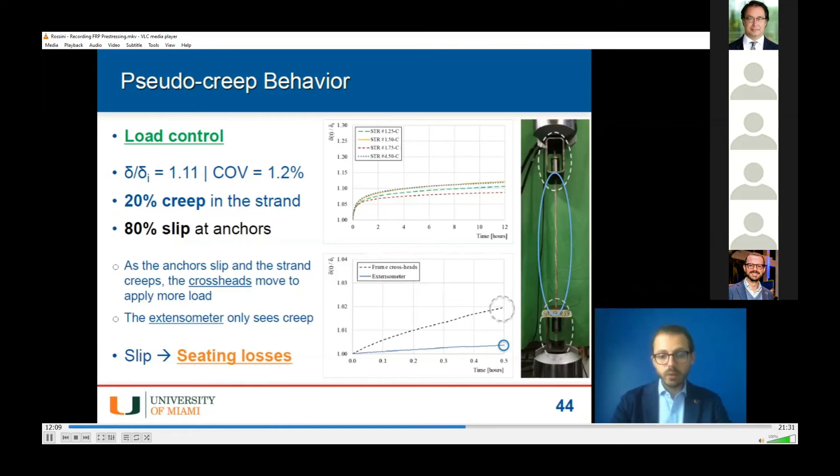Of course, if you have slipping at the anchor location, you should expect some load losses. That's why we also conducted pseudo-relaxation tests aimed at measuring these losses, which amounted to up to 20% of the initial load we were applying. Using an extensometer, we noticed that most of the losses, or at least a good portion of it, were caused by slipping at the anchor location.

Now, this level of losses, 20%, even though over a short length, was deemed excessive to achieve effective pre-stressing on site, so we decided to try alternative pulling procedures to make it feasible and more efficient.

In trying different alternative procedures, you should keep in mind that sometimes you deal with very refined pre-stressing facilities, and sometimes you are just in the jungle, as you see from the picture there, a typical pre-tension yard in South Florida. The first solution we tried is the one I already mentioned.

We load our strand up to the level we want, then release it and see how much losses we get, and that's 20%.

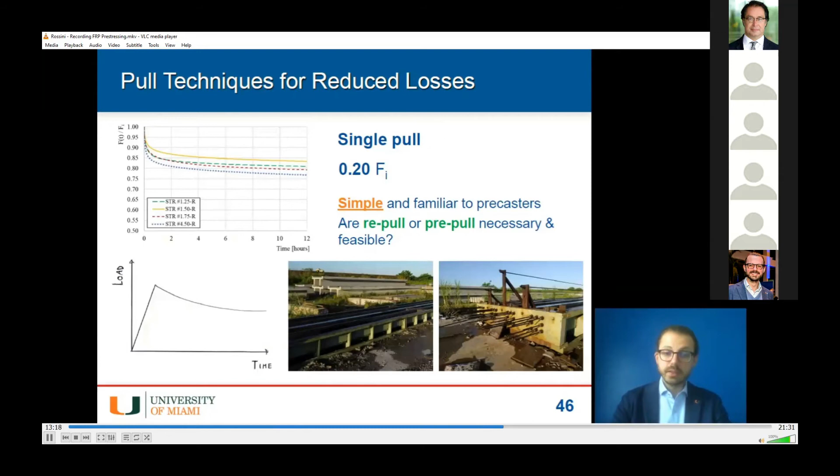That's too much, so we decided to maintain the load applied in load control before switching to displacement control for a while, from 1 minute to 15 minutes. This solution is effective in reducing the level of losses we have, but still not enough, and it's also a very difficult procedure to deploy in the field.

So we propose an alternative procedure: pulling our strand up to the level we want, letting it rest overnight for at least 12 hours, going back to the field, and pulling it again. At this time, we pour our concrete, then let it rest for 12 hours for the concrete to harden before we release our strand and transfer pre-stress to our structure.

This proved to be the most effective solution, and even though it's quite time-consuming, it's something a lot of precasters are still familiar with, because it used to be standard procedure before low relaxation strands were common.

With this, we've answered the fundamental question of whether we can actually pull our glass FRP using traditional anchors, and we saw that we can. Our material is able to maintain that pull, and we can also develop procedures to reduce pre-stress losses, seating losses at levels that are reasonable to achieve efficient pre-stressing.

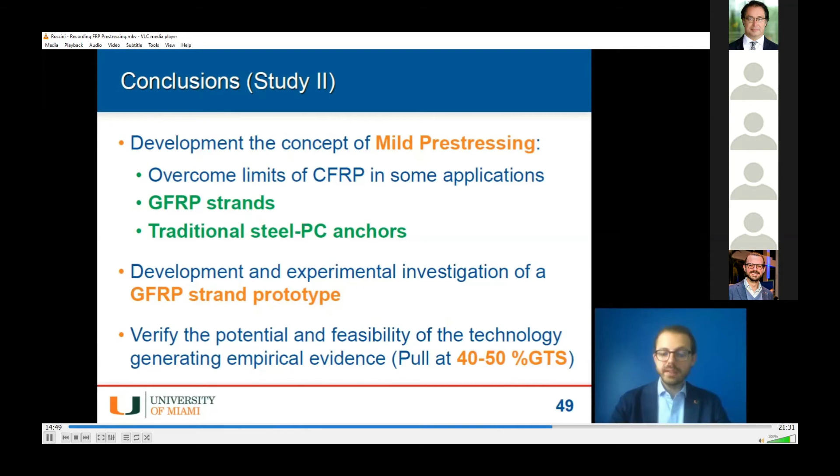One last question remains: whether our structure, after we've built it, is able to withstand that level of pre-tension and sustain load through its entire service life. In order to answer this question, we need to look into the creep-rupture behavior of glass FRP.

First, let's see where we were before undertaking this study. ACI was saying, and is still saying, that you can have a sustained load in your glass FRP reinforcement equal to at most 20% of the design strength of your material. We were able to raise this limit a little while publishing the second edition of the AASHTO design specification in 2018, raising it from 20% to 30%.

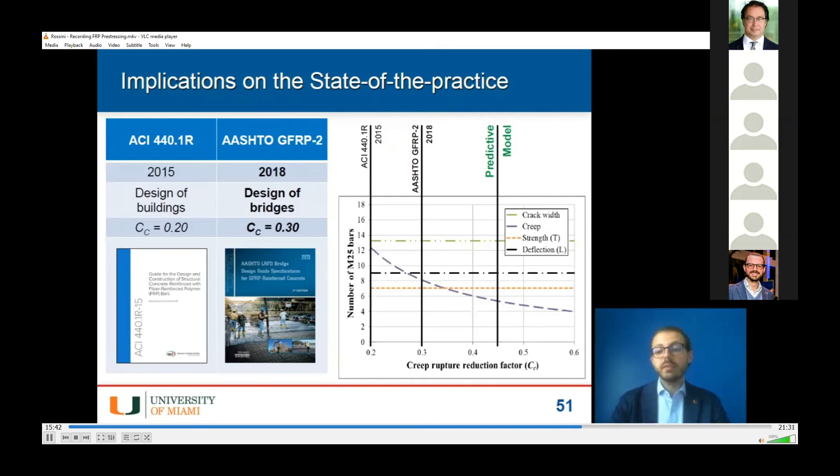But now, through this study, we see that at least in some material systems, this limit can be as high as 45-46% of the design strength. In order to show this, of course, we had to conduct some experiments.

But first, before looking into the experimental results, let's have a look at the conceptual model we built in order to predict the creep-rupture strength of this material, because in addition to a lack of experimental data, we noticed a lack of a conceptual background to interpret this data.

Interpolating lines and points is not enough to predict the design value. We need to account for variability in our numbers, since we have scatter both along the time axis in our times to failure and along the strength axis in the strength of our material. Accounting for that through statistical modeling, we can shift and rotate our main interpolation line and define a characteristic interpolant.

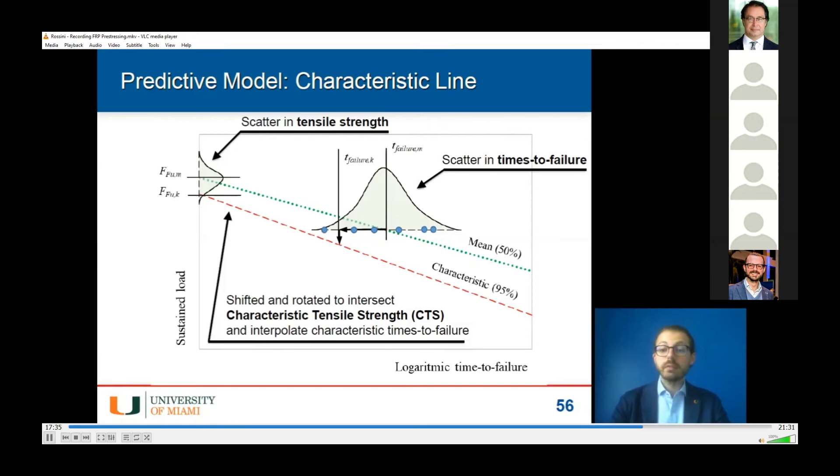That takes care of 95% of our failure points. But 95% is not enough—you don't want 5% of your structure to fail when you design. You want much less. To do that, you need to apply a gamma factor, a safety factor, that shifts your characteristic line down to a guaranteed line, defined consistently between ACI and Eurocodes.

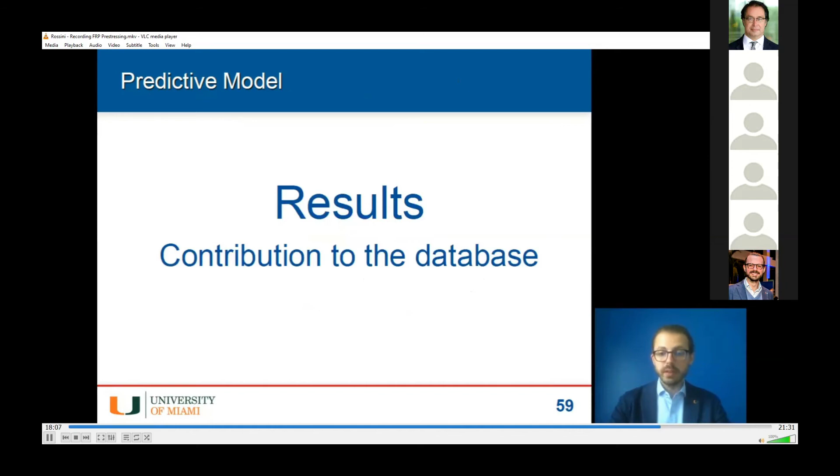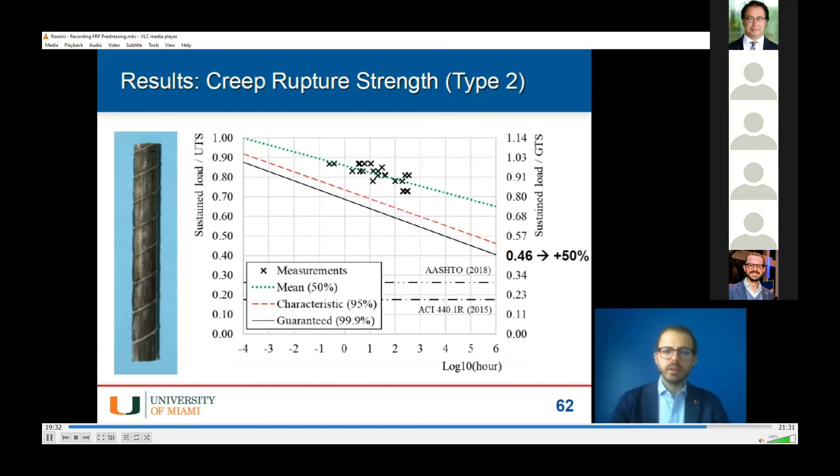We get the same results on the type 2 bar, even though it has a different kind of surface preparation. This is interesting because it may imply—and needs to be confirmed on a larger data set—that the type of surface preparation of our bar does not really affect their rupture behavior.

This answers the third question we were asking ourselves: whether our prestressed structure with glass FRP strand is able to withstand the level of prestress we apply through its entire service life. The answer is yes. To summarize, we looked at a new concept for FRP prestressing using mild prestressing in glass instead of carbon.

Why did we look at this? Because we want to address the problem of corrosion, and some inherent limitations of the current technology. How did we investigate this? First, we assessed the current state of the practice.

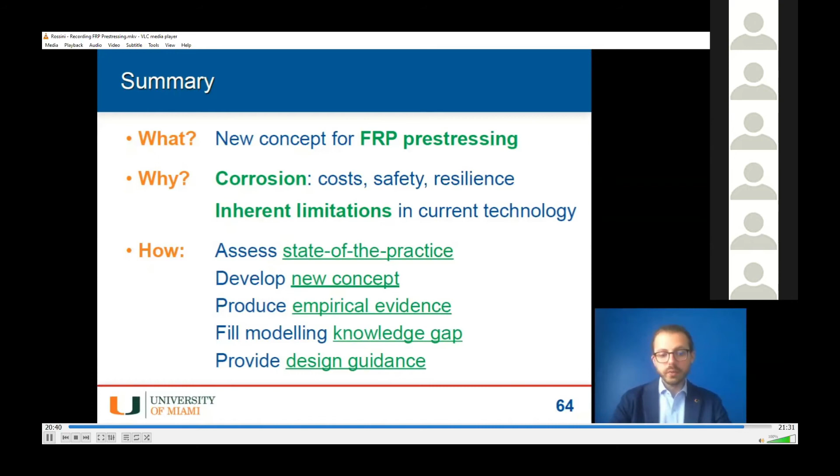We developed a new concept to overcome the limits of the current state of practice, produced empirical evidence to support our proposal, and filled the modeling and knowledge gap in the rupture behavior of glass FRP. In doing this, we also provided design guidance, publishing the second edition of the AASHTO Design Guide specification, and supporting development of the new ACI building code for GFRP.

All of this is not just for the sake of research—this technology is actually working. We have been building and installing two partially prestressed piles with GFRP in a bridge in South Florida. This is the first demonstrator for the technology in a bridge owned by the Florida Department of Transportation.

Thank you, Marco, for your presentation. I know you're online now. It's really good to see the research with prestressed FRP progressing as it is, and the real impacts you're making with those prototype examples and some applications in the field. Before I ask any questions, is anyone else out there that has a question for Marco?

Just going to turn my video off.

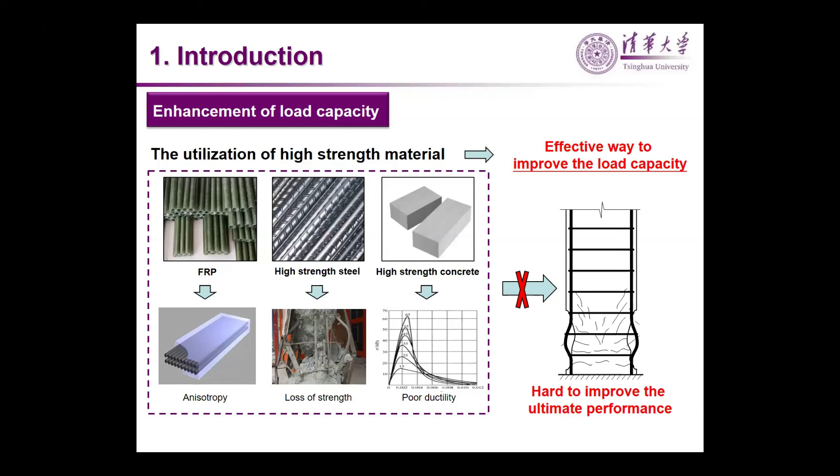On the other hand, the confinement of concrete has been proved an effective way to improve the ductility and anti-collapse capacity of columns. But the traditional CFFT or other confined concrete column configurations are sometimes hard to use in practical buildings due to construction problems. So based on these concepts and problems, a novel component named FRP confined concrete core encased rebar, abbreviated as FCCC-R, is proposed in the present dissertation.

The FCCC-R is composed of internal high-strength steel bars, filled high-strength concrete, and an external FRP tube, as shown in the figure. For this component, the compressive strength and ductility of the filled concrete are enhanced due to the lateral confinement effect of the FRP tube, and cracking and spalling of the concrete is then prevented. Thus, local buckling of the rebar can be prevented under compression due to the lateral support of the concrete. So the problem of strength loss from high-strength rebar buckling and the poor ductility of high-strength concrete can be avoided. This new component shows great mechanical performance under either compression or tension, which can be regarded as a high-performance composite bar.

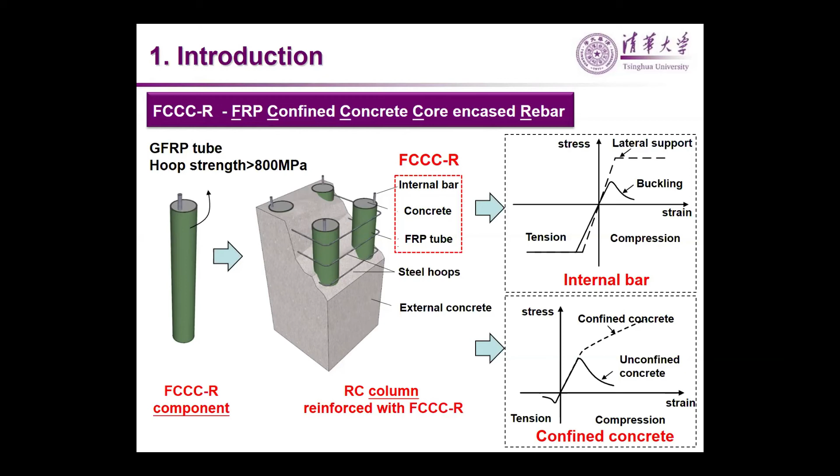By replacing ordinary bars in columns with FCCC-R, part of the concrete region can be effectively confined, and FCCC-R can perform as a high-stress skeleton to enhance the column's mechanical behavior. So this new component can be flexibly used in different parts of traditional RC structures, which highly widens the practical application range of confined concrete.

This slide shows the technical route of this research. At the component level, the buckling resistance effect and the axial compressive behavior of the FCCC-R is studied. At the column level, the compressive and seismic behavior of the composite column is studied. Finally, the design method of the FCCC-R and the composite column is proposed.

For this newly proposed configuration, this dissertation did quite systematic work from the component to the column, from experiment, numerical simulation to theoretical calculation method. In this procedure, from the angle of science research, several key scientific problems were encountered and solved. From the point of view of technology development, the proposed design method can give advice for the practical use of the FCCC-R and the column. So in the second part, I'll give some brief introduction on the research and gains of the dissertation.

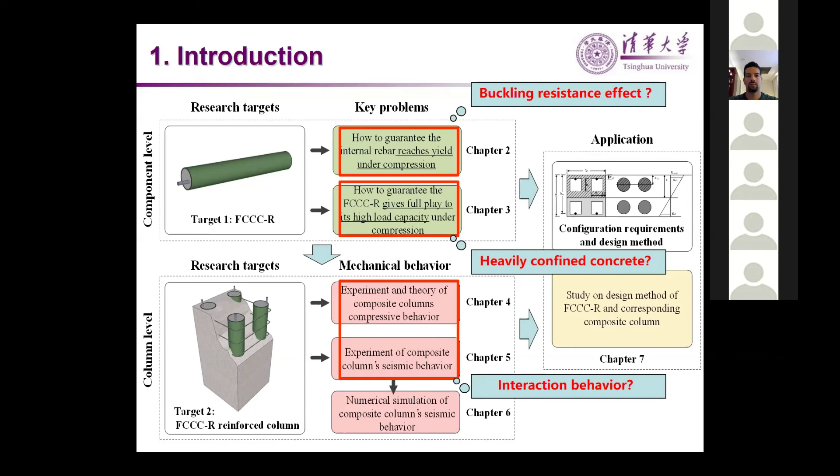In chapter 2, the yield condition of the internal steel bars under compression is firstly studied. Experimental study on 42 specimens under compression were carried out. The axial load was applied only on the internal bars in order to figure out the buckling resistive effect of the FCCC-R.

According to the test results, all the specimens illustrate a quite similar failure progress. The peak load can reach or even exceed its yield strength for bars with a relatively large slenderness under axial compression.

Based on the experiment, the finite element model is then established using the software ABAQUS. The failure progress and the load-displacement curve of the specimen obtained from the FE model agree well with the test result, and additional parameter studies were also carried out.

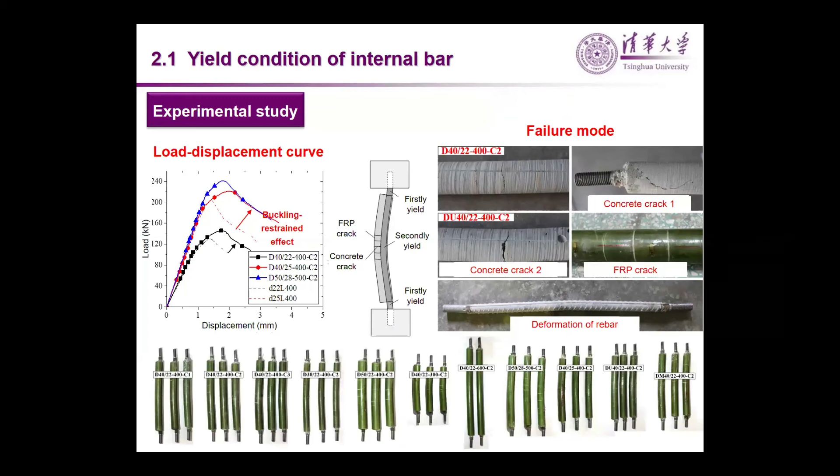Finally, based on the criterion of rebar yielding, the basic configuration rules of the FCCC-R are proposed. As long as the FCCC-R meets the requirement of the proposed minimum effective area ratio, the yield of the embedded rebar under compression can be ensured.

In the next chapter, the axial compressive behavior of FCCC-R is studied. 9 specimens were tested under either monotonic or cyclic compressive load, and test results indicate that the ultimate failure of the FCCC-R is controlled by the circular fracture of the FRP tube. The load-displacement curves of the specimen show a typical bilinear ascending behavior, which is quite similar to that of the ordinary CFFT, the concrete filled FRP tube.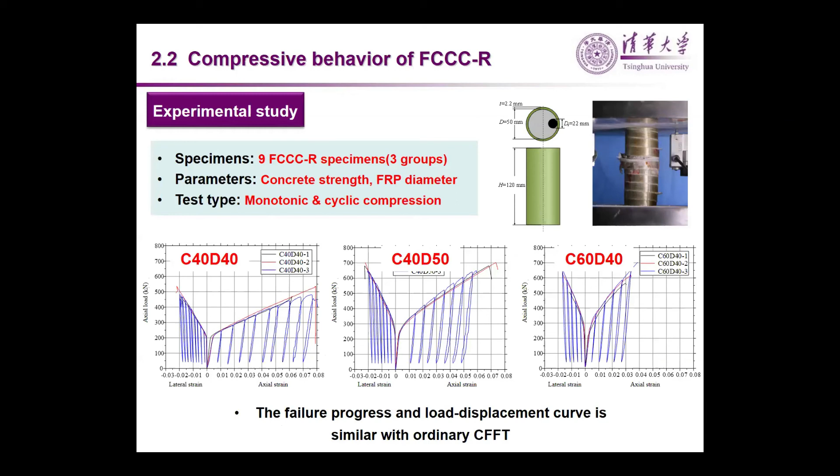In order to predict the compressive behavior of the FCCC-R, six confined concrete models were chosen to calculate the load-displacement curve. However, traditional theory of FRP confined concrete illustrates obvious deviation in predicting axial compressive behavior of FCCC-R.

We believe the reason for this phenomenon is that the thickness-to-diameter ratio of the FRP tube in FCCC-R is much larger compared with the ordinary CFFT, resulting in a much higher confinement stiffness. It can be seen that most of the data used to calibrate the concrete models have a confinement stiffness less than 2000 megapascal, while that of the FCCC-R reaches around 3000 to 4000 megapascal.

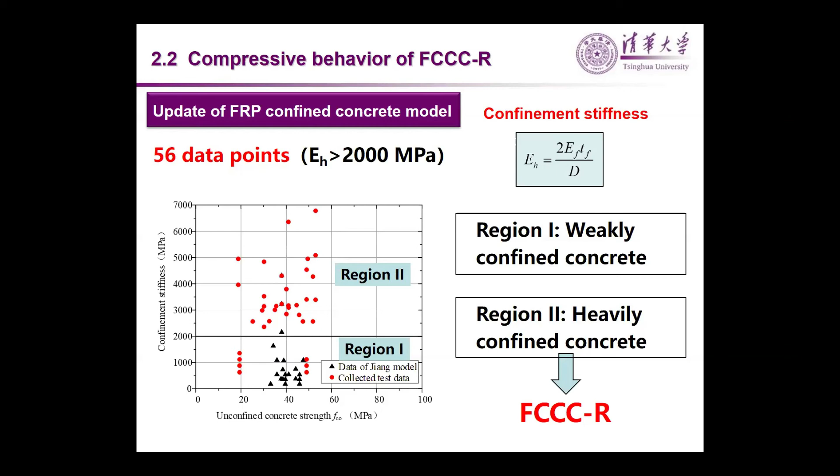In order to make a more precise prediction of such heavily confined concrete, we collected test data of 56 FRP confined concrete specimens from previous papers. By analyzing these data, the popular analysis-oriented model proposed by Jiang and Teng is updated in this dissertation to ensure the accuracy for heavily confined concrete.

By bringing this updated model into ABAQUS, the finite element model is also established and calibrated by the test result. Moreover, the influence of the diameter and the location of the internal rebar is also analyzed and discussed.

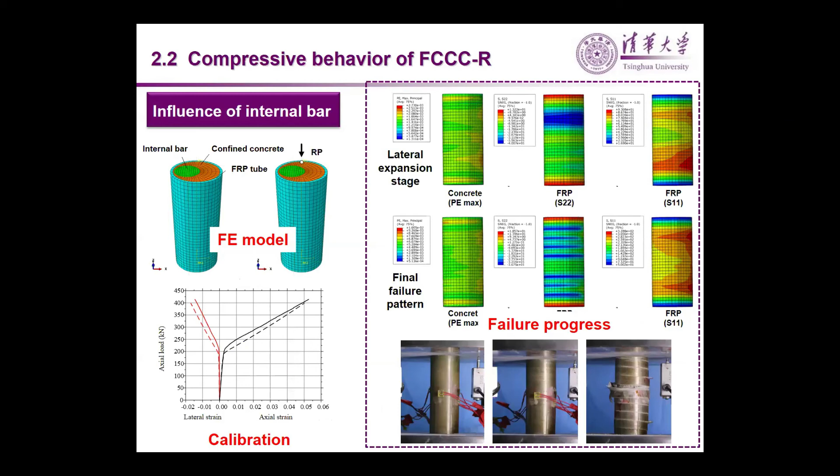In chapter 4, the compressive behavior of columns with FCCC-R is studied. 8 FCCC-R-reinforced columns were tested under cyclic axial compressive load. The main parameters include the amount and diameter of the FRP tube, as well as the stirrup spacing.

Test results indicate that the existence of the FCCC-R will change the final failure mode of the column. During the test, local buckling of the vertical bars, rupture of the steel hoops, and crushing of the core concrete were not observed. But it is noticed that the overall buckling of the FCCC-R has become a critical issue and shows obvious influence on the compressive performance of the column.

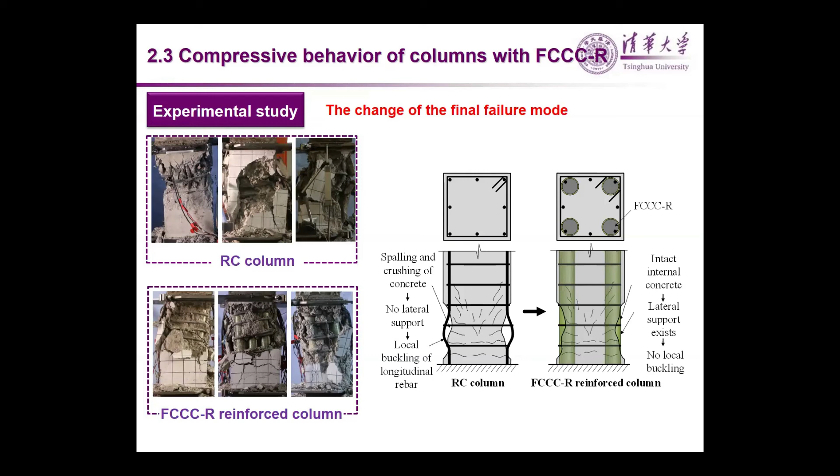The load displacement skeleton line, peak load capacity, and ductility capacity of the composite columns are summarized. With proper FCCC-R and stirrup arrangement, the load displacement curve of the columns can illustrate a second ascending branch, resulting in obvious enhancement of load capacity and ductility.

In order to calculate the performance of FCCC-R in the columns, the overall buckling and the influence of the lateral support should be figured out. Firstly, the finite element analysis is carried out.

Then a Newmark method and a cross-section strip method are adopted and programmed in the software MATLAB. Then a simple method combining the load capacity and the modified Euler load is proposed. By comparison of these three methods, the accuracy of this simplified calculation method is verified.

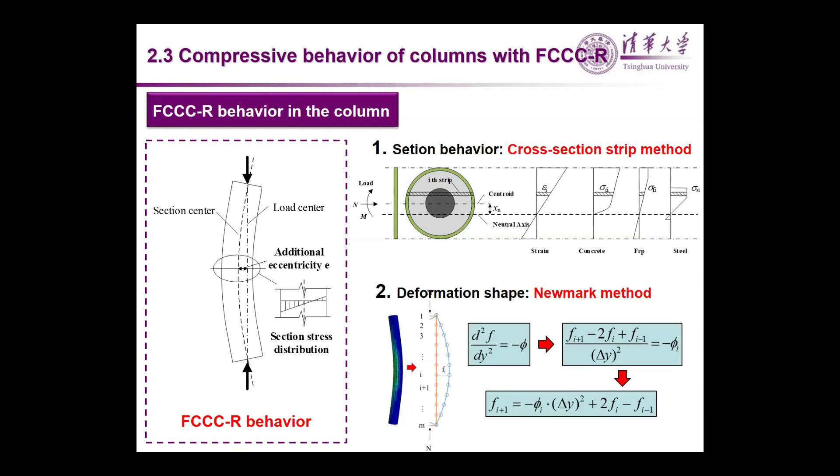At the end of this chapter, the cross-section superposition method is proposed for calculation of the load displacement performance of the column, and the result showed good agreement with the test result. Moreover, it is noted that the load provided by the FCCC-R is the main part of that of the columns, which played as a strong skeleton as we expected.

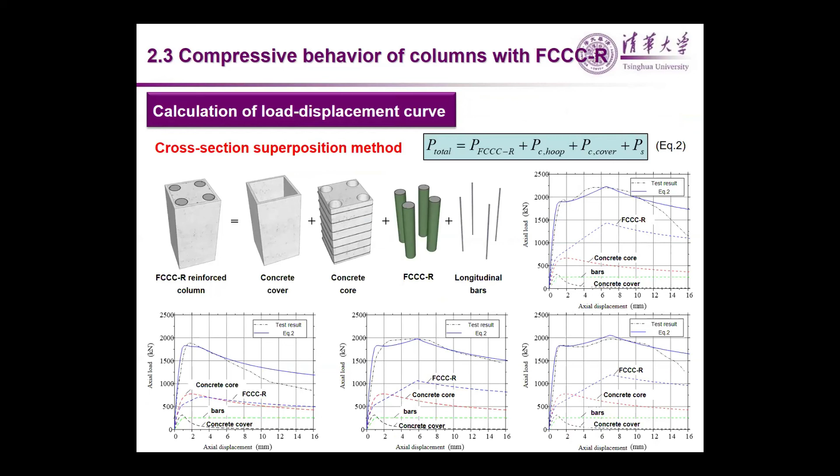In chapters 5 and 6, seismic performance of the FCCC-R reinforcement columns is studied experimentally and numerically. Experimental study was firstly carried out under the combination of constant axial load and cyclic lateral load.

During the test for columns with FCCC-R, no local buckling of the vertical rebar or severe concrete crush is observed at the plastic hinge zone. All the composite columns illustrate a vertical splitting failure pattern, which indicated that the bond between the FRP tube and the outside concrete cover has a great influence on the utilization of the FCCC-R.

But this failure mode will only influence the column's behavior at a relatively large lateral drift ratio, with little influence around the peak point. Besides the failure mode, the bearing capacity and hysteretic performance of the columns were obtained and compared.

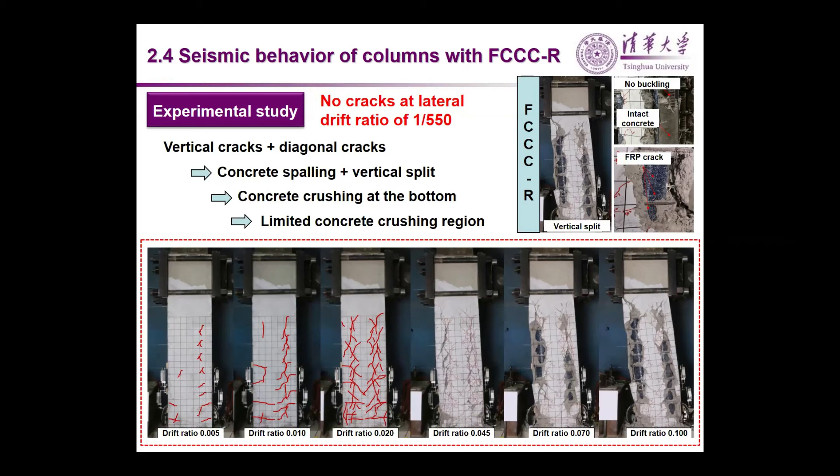By adopting some bond strengthening configuration between the FRP tube and the concrete cover, such as applying a thin FRP jacket to the columns, the seismic performance of the column can be enhanced significantly and show excellent hysteretic performance.

Due to the bar buckling resistance and the confinement effect of the FCCC-R, the composite column specimens illustrate a higher peak load and better ductility and energy dissipation capacity under seismic load.

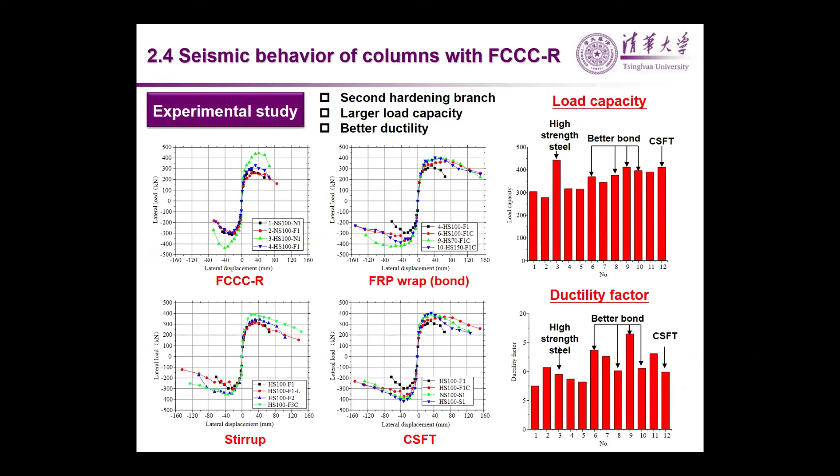Based on the test results, software OpenSees is used to establish the fiber section model of the columns. But due to the vertical splitting failure mode, slipping exists at the FRP tube concrete cover interface, so the plane section assumption is no longer strictly followed.

Therefore, FCCC-R and external concrete cover are modeled separately in OpenSees, and a series of spring elements are established between these two parts of the model.

The accuracy of this model is then verified by the experimental result. Based on this modeling method, the influence of different parameters such as the axial compression ratio, the bond behavior, and the arrangement of the FCCC-R, etc. is analyzed and discussed.

In chapter 7, the design method of the FCCC-R and the column is proposed and discussed. One of the critical principles in the design of the columns is that we did load capacity check at two types of ultimate state.

This includes the ultimate strain of the ordinary concrete, 0.0033, and the ultimate strain of the confined concrete, 0.01. If we consider only the ordinary concrete ultimate state, the concrete confinement effect will be highly underestimated.

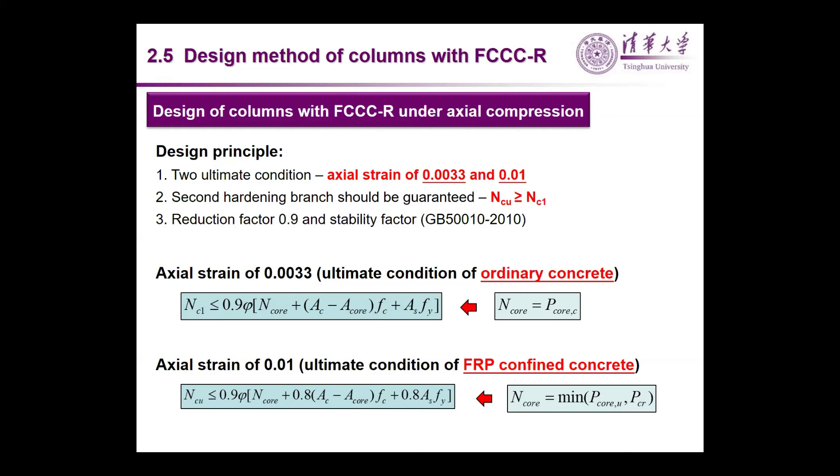For flexure design, the equations for calculation of the MN curves are proposed and calibrated. Finally, a design example is executed. It is indicated that the columns can be designed with a smaller section area and less steel reinforcement by equipping FCCC-R.

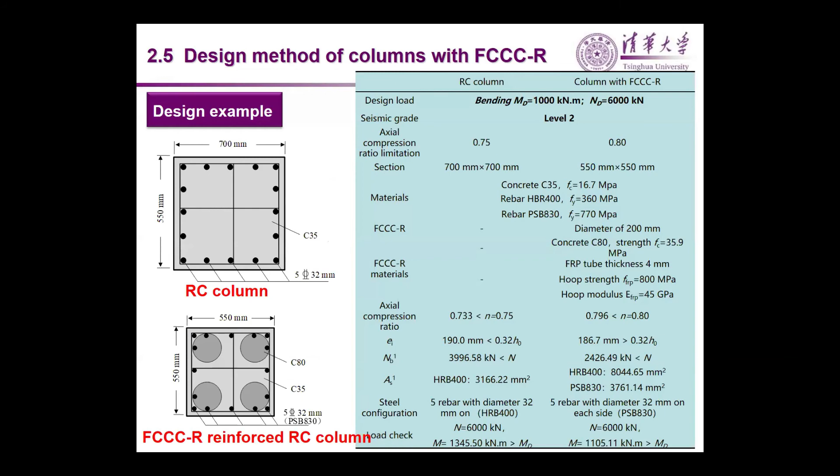As for the scientific problems, the buckling behavior of the internal steel bars in the FCCC-R is figured out, and the column model is updated. The concrete model is updated to ensure accuracy for heavily confined concrete. The interaction effect and the overall buckling behavior of the FCCC-R in the columns is figured out.

From the point of view of technical problems, the basic configuration rules of the FCCC-R component are proposed. A superposition method is proposed to calculate the axial load displacement behavior. A separate modeling method is proposed to simulate the column seismic behavior in OpenSees. Finally, the design method of the component and the columns is proposed.

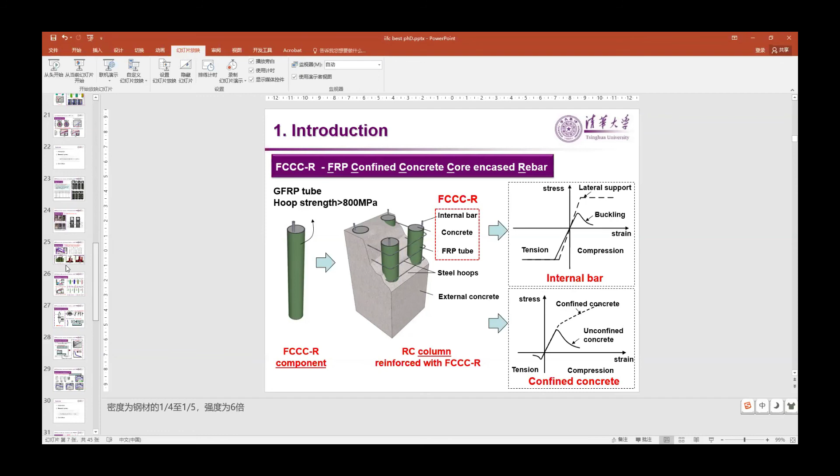And I think there is one picture that can show the position. Well, I'm thinking about how you handle this in the field, because even though it's very heavy, I suspect it is also reasonably flexible when handling it like a bar, in which case is there not damage during handling and so forth?

Well, yes, we can use some machines to do this work, and also we can have it done by workers. I think it's not a problem, since in the lab we did this work. So in the field, I think it is also possible to do this work by the constructor.

So how heavy is a 4-meter long piece of 100mm FRP confined bar? I suspect it's fairly heavy. Well, yes, but compared with the CFST, compared with the steel tube, it is quite lighter than steel tubes. So we can also use steel tubes in the columns. It is not a problem in the construction field.